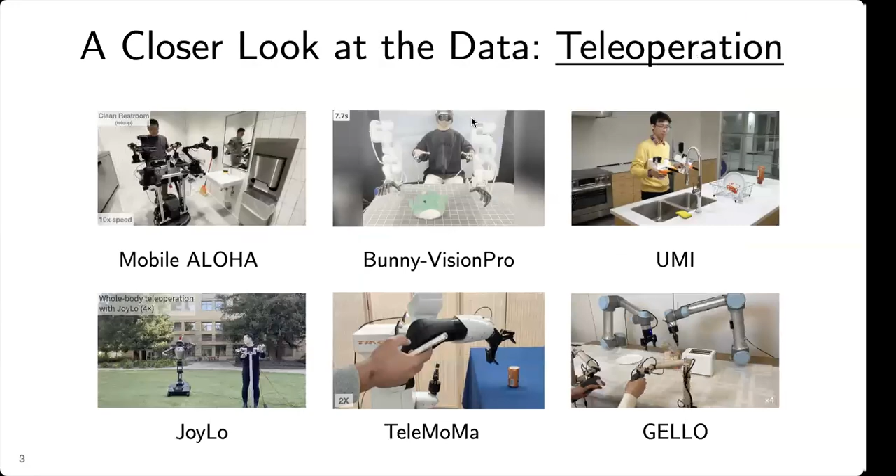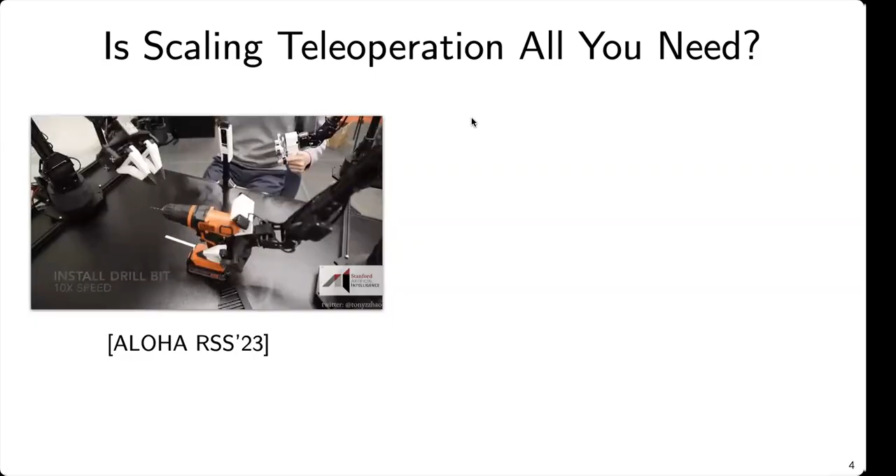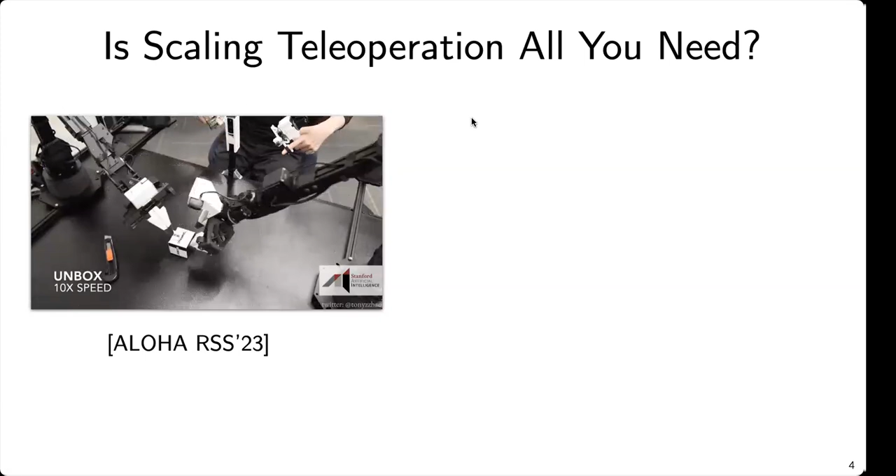Nowadays, teleoperation seems to be the dominant approach. Over the last few years, we've seen an explosion of easy to use interfaces that allow us to control robots and do more dexterous things. I think the Aloha system at RSS 2023 was really the one that made the community believe this approach can scale. Look at the dexterity you can achieve with just a low-cost bimanual robot system, doing really dexterous things like in-hand rotations and solving assembly tasks, solving these NIST assembly boards, all of which people thought parallel grippers cannot handle, but it seems like this was very promising.

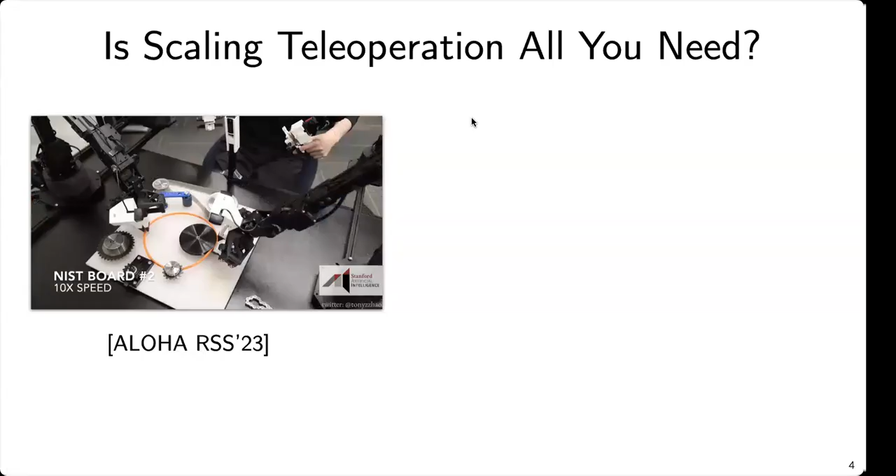But I really think the story starts showing a crack now. Collecting more and more demos started to hit a plateau. Even when we went from 6,000 to 8,000 demonstrations, the success rate was still 75%, and we couldn't go beyond that. Apart from that, there's a second problem: the speed. During teleoperation, the robot moves slowly, carefully, well below the limits of the hardware itself. So I think we are really restricting the robot's capability.

That's my first claim: teleoperation limits the robot's capability. Here's a video at 1x of my collaborator Max trying to open a bottle with teleop. This is a very simple daily task, normally taking a human a couple of seconds. But in this leader-follower setup, navigating the robot's kinematics and the gap in perception makes the task much longer.

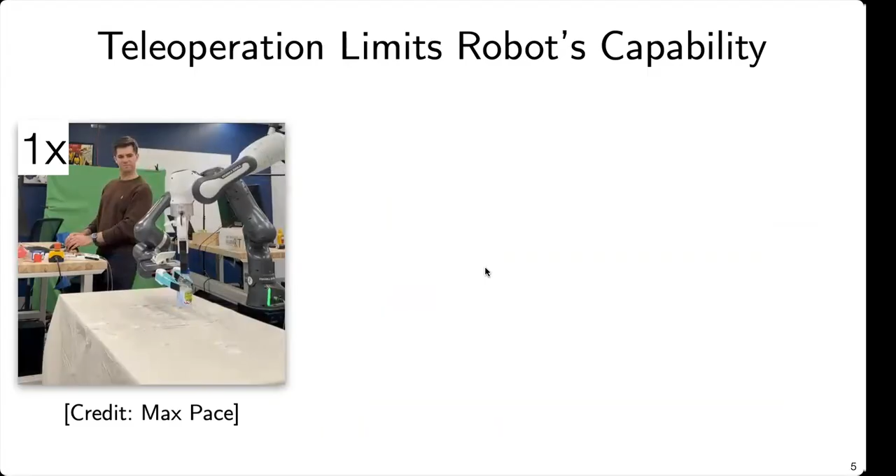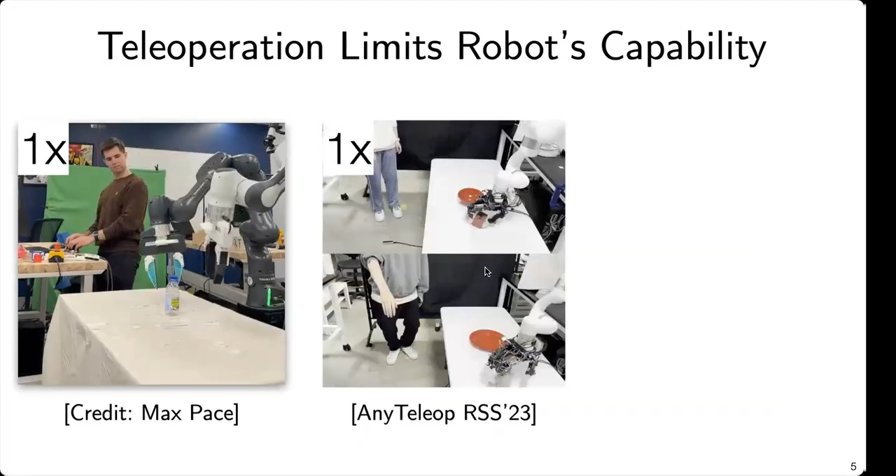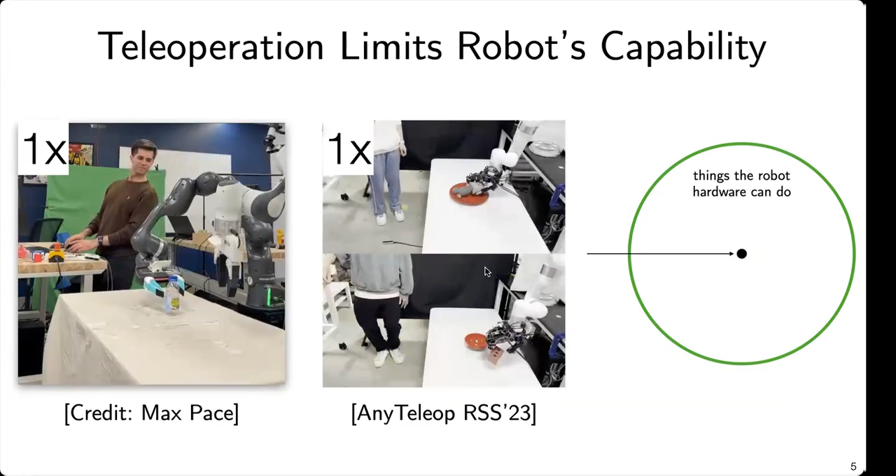This problem is more pronounced for complex robot embodiments like dexterous hands, where the control problem requires precise and forceful contacts. Teleop restricts robot hands to largely pick-and-place tasks. If this green circle is everything the hardware is physically capable of, teleoperation only ever captures a tiny speck in the circle.

Now back to the robot learning stack: imitation learning takes teleop data, which is state action pairs, and fits a neural network policy. But there are two problems with this story. First, as we just saw, teleoperation caps the quality of this data below the hardware limits. Second, this data is static and offline. It's almost entirely successful trajectories. There are no demonstrations of how to recover when things will inevitably go wrong.

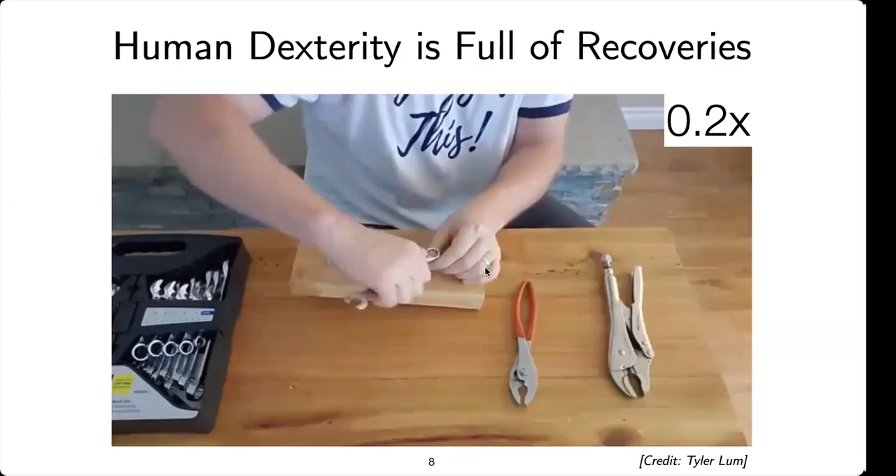So how do we achieve robots that can do these kinds of tasks? I think we should let robots learn from their own experience. In this paradigm, the policy generates its own data by doing trial and error. And I think in order for this trial and error, which involves low-level joint actions, to be safe, we'll do this inside a simulation, which is an approximate model of the world.

Now the learning stack looks a bit different. It's kind of the same arrows and the same learning-from-data story, but there's a reward attached to the state action pairs in our dataset, and it contains information about failures and counterfactuals. This process of trial and error really lets the policy learn to recover. This paradigm is called sim-to-real reinforcement learning.

In locomotion, this process of sim-to-real RL has been really successful, unlocking the limits of robot hardware. For example, the Cassie broke the Guinness World Record for the 100-meter dash under 25 seconds with this sim-to-real RL process.

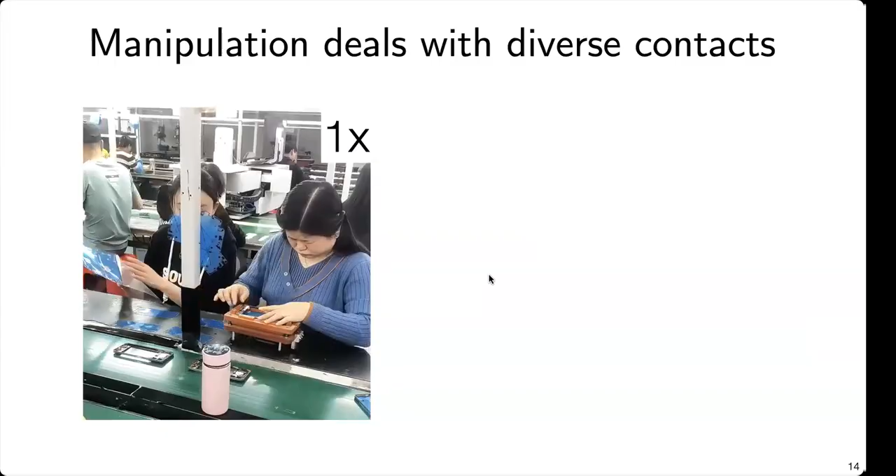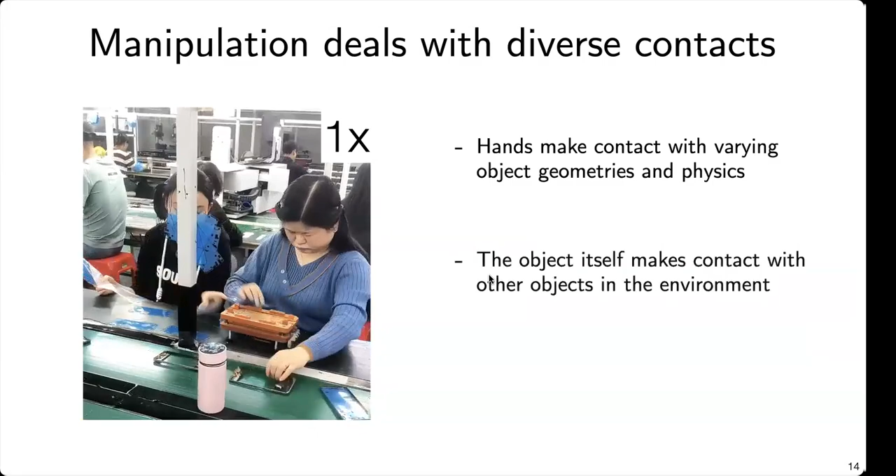On the other hand, manipulation looks so different. Take this assembly line worker: beyond the super fast speed, her hands are making contact and manipulating multiple object geometries with different physical properties. The manipulated object in itself is making contact with other objects in the environment, and contacts extend to other humans who are dynamic, moving, not static.

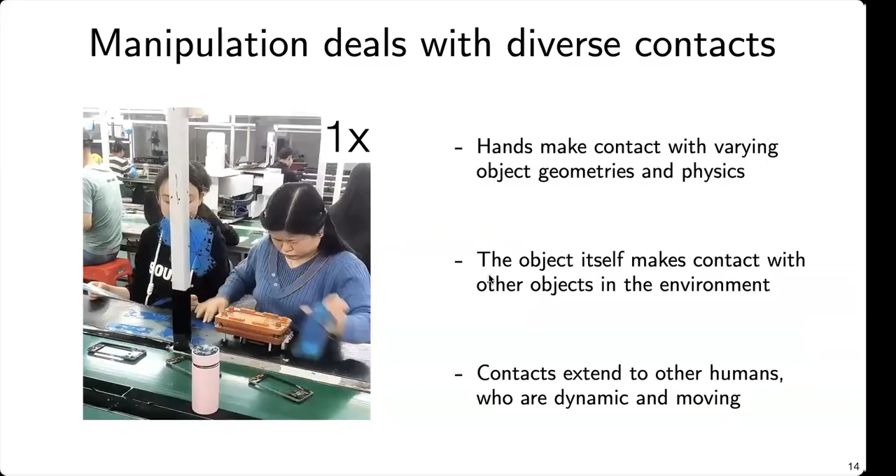So that's challenge 1.

Challenge 2 has to deal with RL itself and the exploration challenge, getting reward signal to learn from. Even here, locomotion has it easy. With a single move-forward progress reward, DeepMind showed back in 2017 in MuJoCo that you can train diverse robot embodiments to run, jump, crouch, climb through mazes. I think it's because throughout the state space, the reward is dense, which makes RL exploration easier, as there's always some reward gradient to follow and make policy improvements.

On the other hand, it's more difficult to write reward functions in manipulation tasks. Consider things like kneading dough. It's not super clear what's a dense reward here, what's the sequence of states the robot needs to complete. I think the signal lies in the narrow corridor to the goal. If you're not on this path, you're basically not getting any signal for policy improvement, and this makes RL exploration brutally hard. So that's challenge 2.

Challenge 3 is about closing the sim-to-real gap itself, that is training RL policies in simulation that will actually transfer to the real world. Even here, if we compare locomotion with manipulation, on the perception side, proprioception alone gets you a long way in locomotion, which has almost no sim-to-real gap.

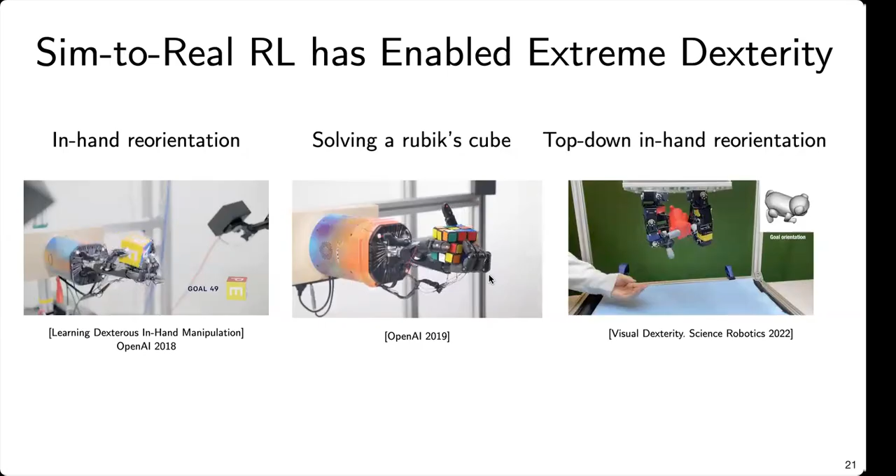And these results are not exclusive to OpenAI. Academia also reproduced these results, doing even more challenging tasks like top-down in-hand reorientation, where you're controlling the object against gravity.

The common problem here, though, is that each of these projects is single task, and there's a considerable amount of task-specific reward tuning and environment design that has to go into making these policies work. For one task, you're spending multiple months to get this pipeline up and running.

Each project hand-engineered this tiny overlap between what the robot can do in the real world and what the robot can do in simulation. And if you have to do this manually every time you set up a new task, this won't scale.

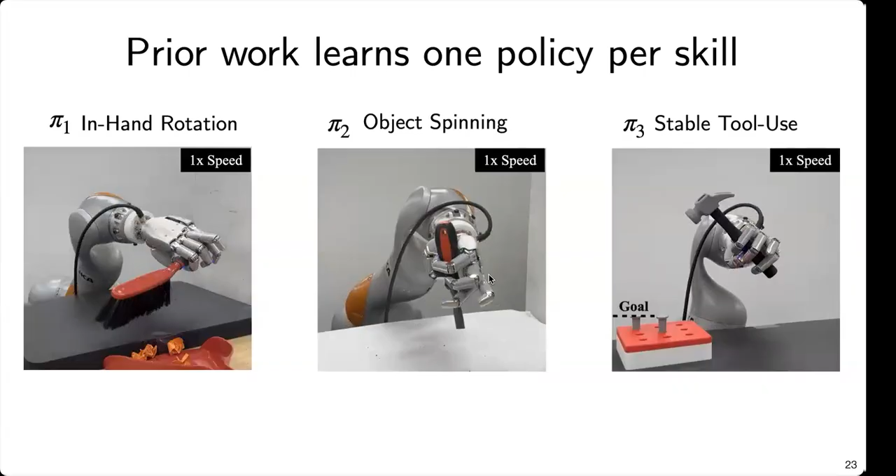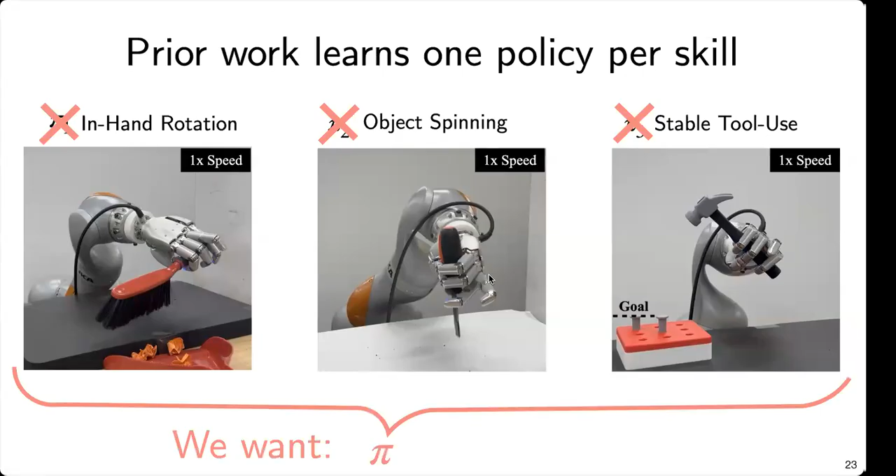Prior work learns one policy per skill, a separate policy for in-hand rotation, separate policy for spinning, another for tool use, each with its own task specification, reward, and environment design. This doesn't scale. We don't want this zoo of brittle single-skill policies. Ideally, we want a unified multitask policy, trained with a single unified objective that produces general dexterity.

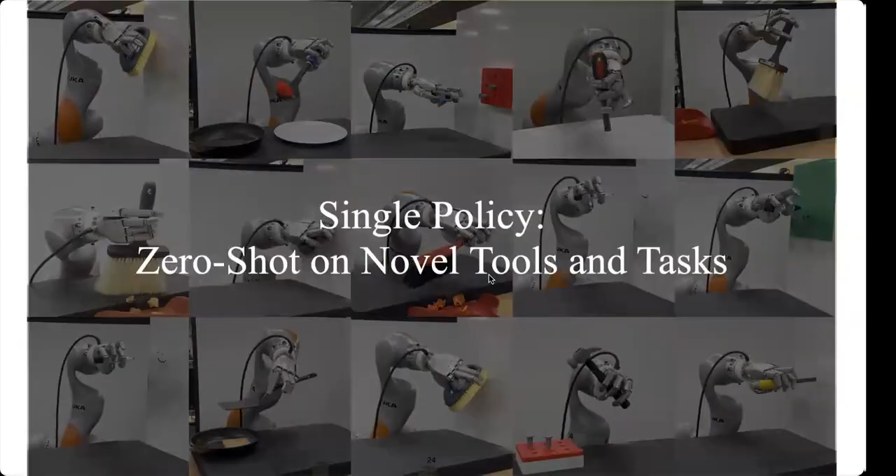That's the goal of the first piece of work I'm going to talk about: train an RL policy in simulation that can apply zero-shot on novel tools and tasks. This is SimToolReal, joint work led with Tyler, which will appear at RSS this year.

The key insight here is to unify manipulation as goal reaching. Instead of thinking of specific verbs like hammering or sweeping, what if we consider each task to be a composition of sub-goal reaching problems? Here, the green wisp you see is showing the goal poses that the policy is tracking, and we can break down a large amount of manipulation problems by just composing multiple goal reaching problems.

That makes the training objective for RL simple and general. We will just get good at this unified training objective, where we procedurally generate primitive objects in simulation, sample random goal poses for the robot policy to track, and then train with massively parallel RL in simulation, manipulating these random objects to random goals.

And if we keep getting good at this singular objective, we can zero-shot transfer at test time to new tools and new tasks. We don't require any task labels, no per-task rewards, just this unified objective.

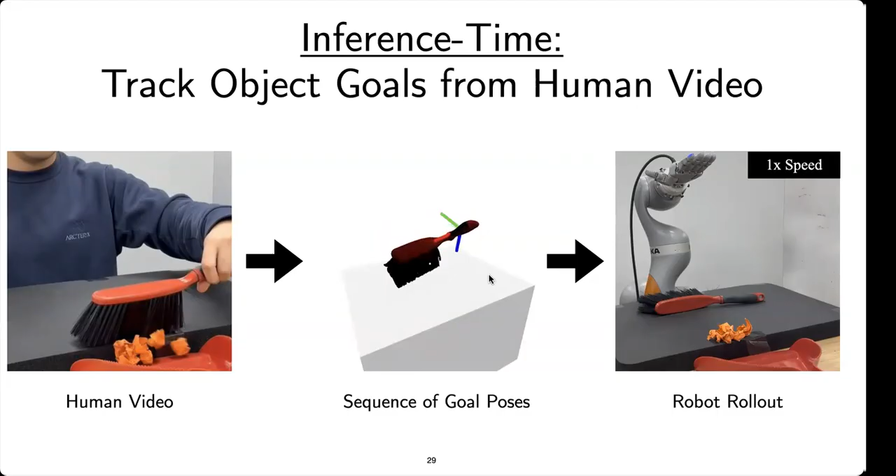So here we collected a human video showing how to sweep a brush across the table. From this, we extract a sequence of object goal poses, which is tracked one by one by the object-centered policy. Each time it hits a goal, we provide the next one, and we can complete the task by composition.

And we evaluated this policy zero-shot across 6 tool types, 12 objects, 24 tasks. A single policy was good enough to get reasonable success over this entire variety.

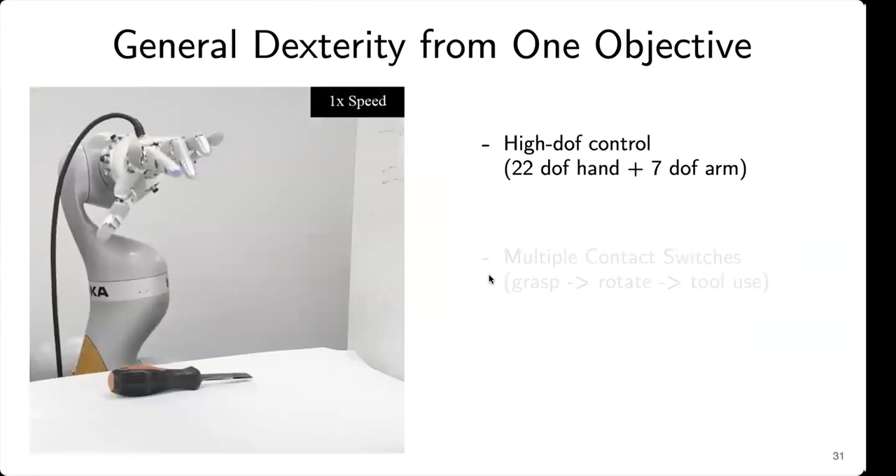But it's not the breadth that I think was hard. I want to emphasize the hard part of these tasks. First, this is high dimensional control—we are controlling 22 DoF on the hand, 7 DoF on the arm. Second, every task requires multiple contact switches: grasp the tool, reorient it in hand, and then use it.

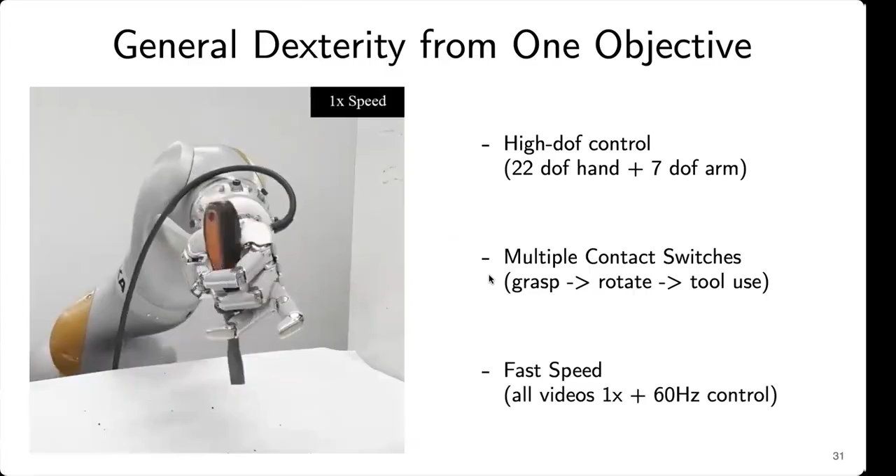And for me, the most important part is how fast it is. This is 1x, 60 hertz control. These are fast, fluid dexterities that teleoperation simply cannot match.

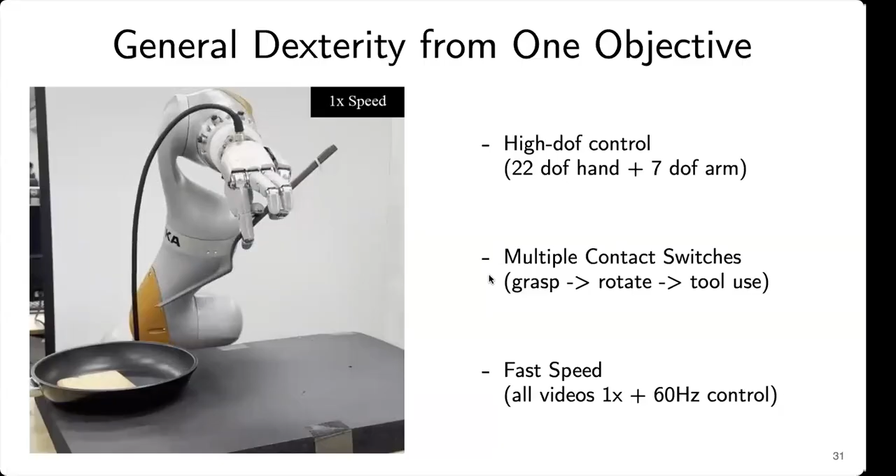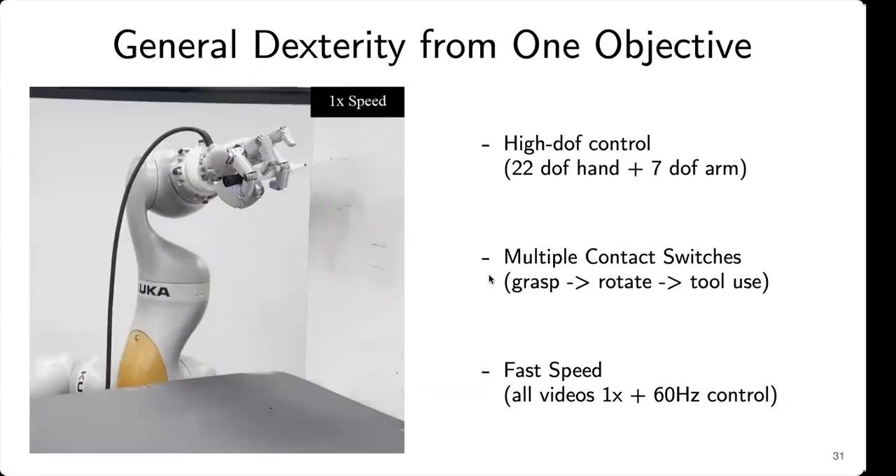Let's compare with some baselines to set a comparison point. Our method, SimToolReal, is able to do both grasping of objects and then the in-hand tool rotation, which is important.

A common baseline in prior works is actually using fixed grasps: do the grasping, then lock the grasp. The arm will try to complete the rest of the tool rotation, but this can lead to collisions with the table, and it's not a general solution.

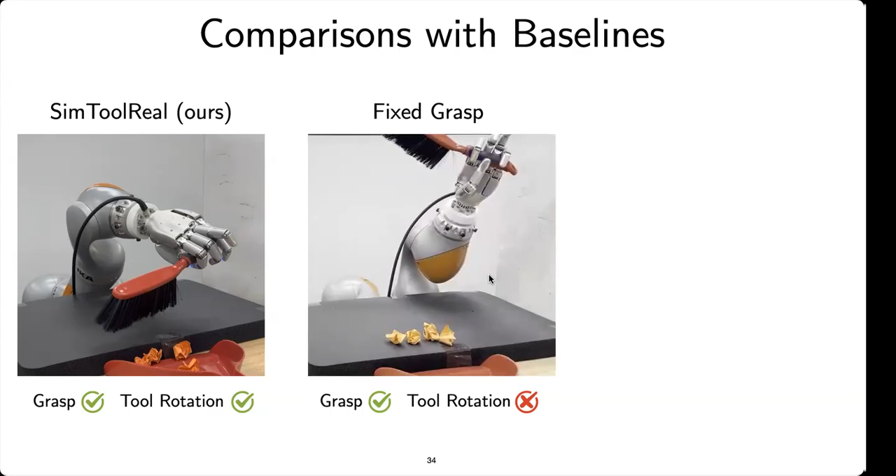Kinematic retargeting from human hand motion is another option, but human videos do not contain any contact force information, which makes it harder to complete tasks like thin handle grasping.

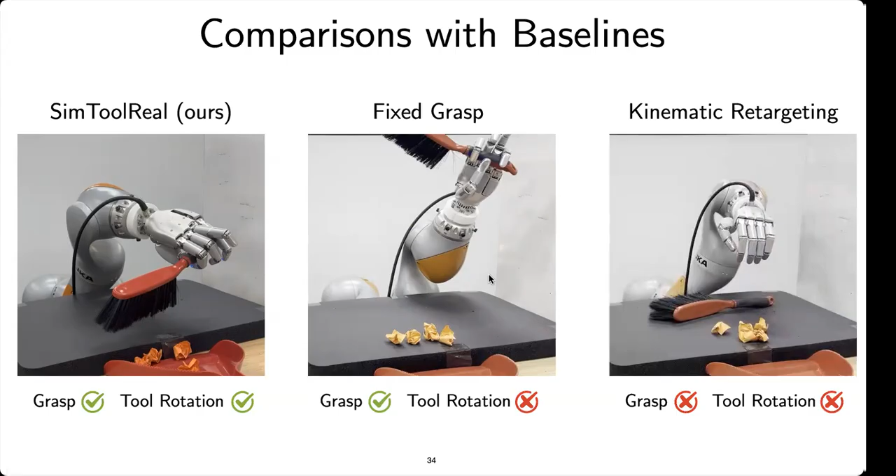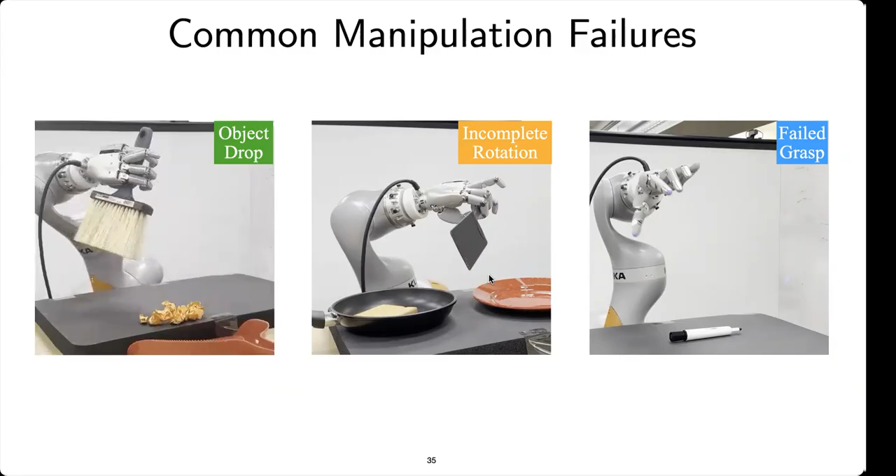Finally, SimToolReal is not perfect. There are failures. For example, things like dropping objects after grasping, or getting stuck in between rotation and not being able to achieve goals, or even failed grasps.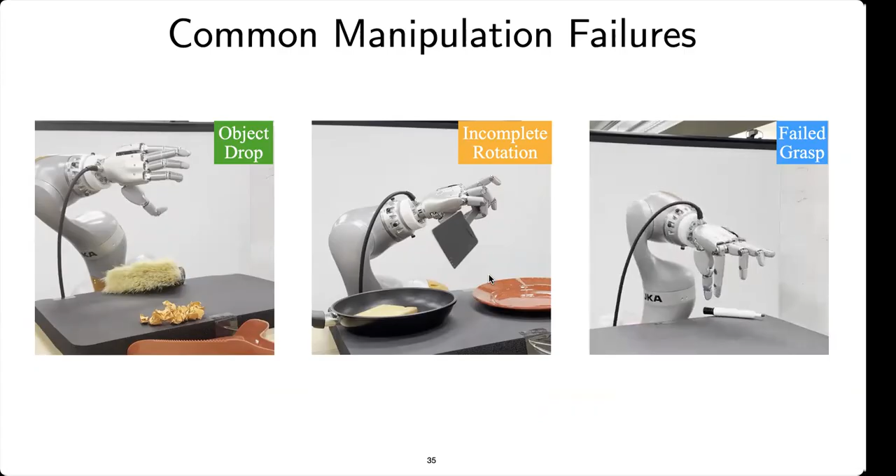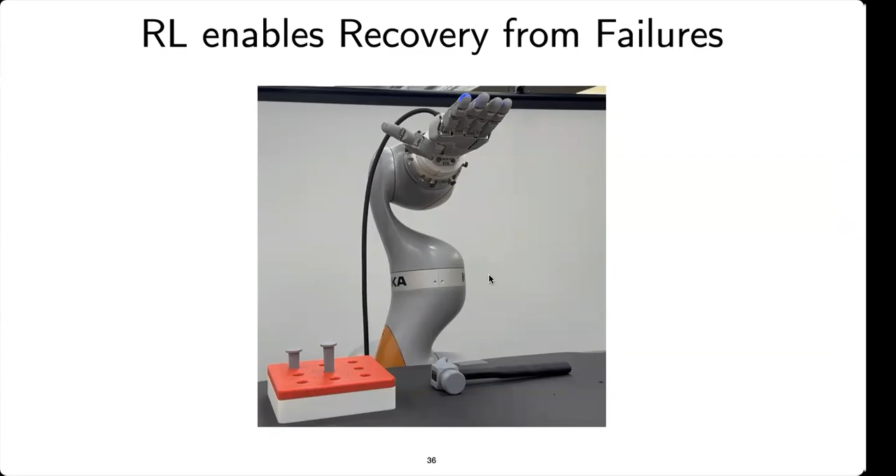But notice how it chases after the object. That's what RL gets you. RL enables the policy to recover. Here's a video where the policy actually did succeed after failure. The policy goes in for the hammer, drops it, then can go in again, reorient it in hand, get it stable, and finish the task.

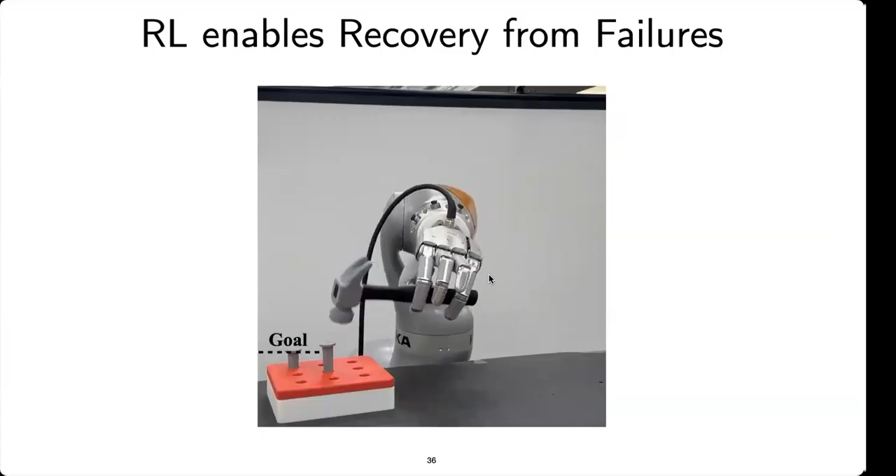So stepping back, the story of sim-to-real previously was a lot of task-specific engineering for each thing we want to do in the real world. Our contribution to challenge one is to make the sim RL objective general and unified, goal reaching on random objects, so a single policy covers the large variety and diversity of things we want in the real world. So that's how we capture diversity by a unified objective for dexterous manipulation.

Next, we want to move on to harder manipulation tasks, which will make the RL exploration more challenging. Specifically, consider contact-rich, precise assembly tasks. These are forceful, millimeter precise skills that are very difficult for robots.

There's a question. Yeah, Kushal, it's me. Just a quick clarification question.

In the previous paper, can you talk a little bit about how you were tracking the objects in real time, at inference time rather? We are using an off-the-shelf tool called Foundation Pose, which is a 6D pose tracker, and we run it at 30 hertz. Okay.

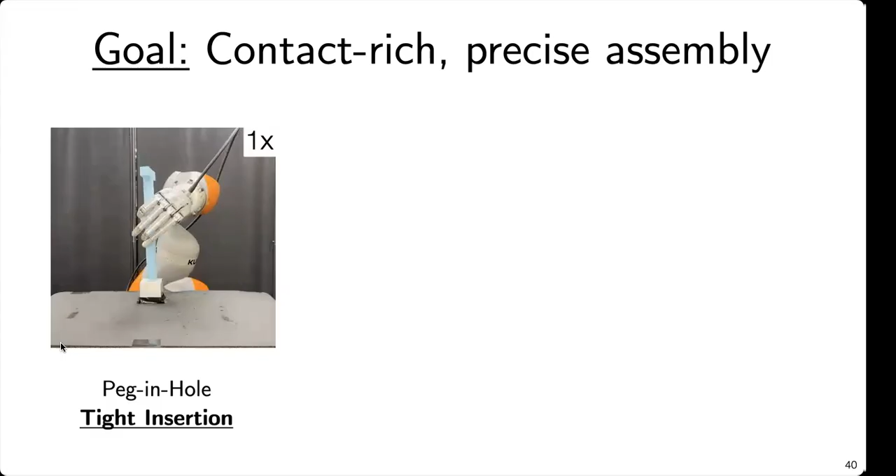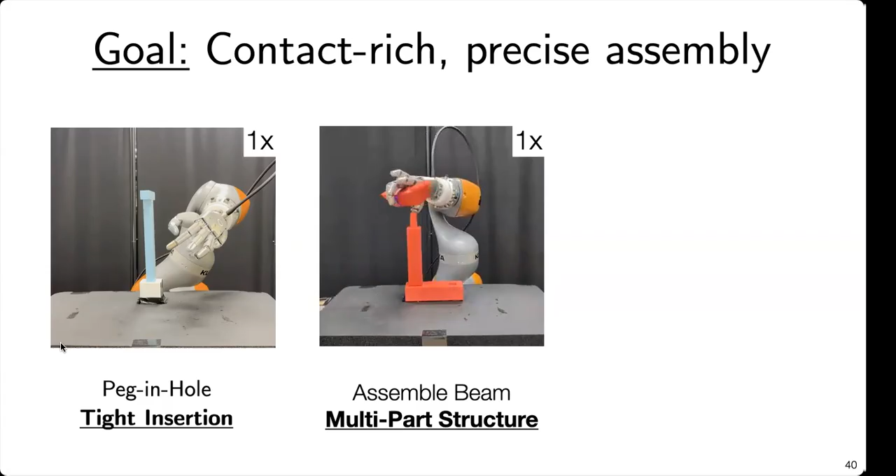Okay, so coming back to our next goal, this is contact-rich precise assembly. These are tasks like tight peg and hole insertions. See how the robot is kind of using the contact to feel for the hole region and then goes in. Second, assembling a multi-part beam structure where the assembly parts start scattered on the table. And last, consider screwing a leg onto a tabletop base.

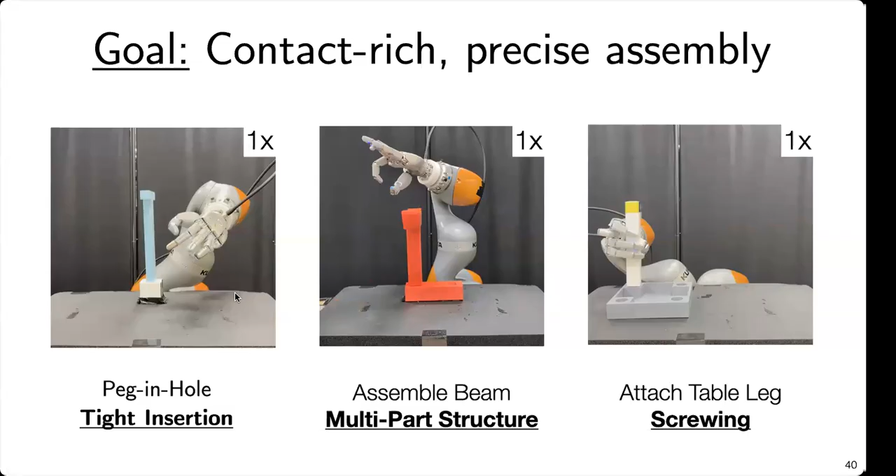These tasks are not just about being precise. It requires reasoning about contacts. And what makes this problem especially hard is that the initial states of the objects are all over the place, and the problem is defined just by the goal state to achieve.

So going from start to finish is not a single motion. It's a long chain of exploration of things like grasping, in-hand rotation, goal pose reaching, and the final contact-rich interaction with the fixture. Success signal is only achieved after this long horizon of exploration, which can make RL hard.

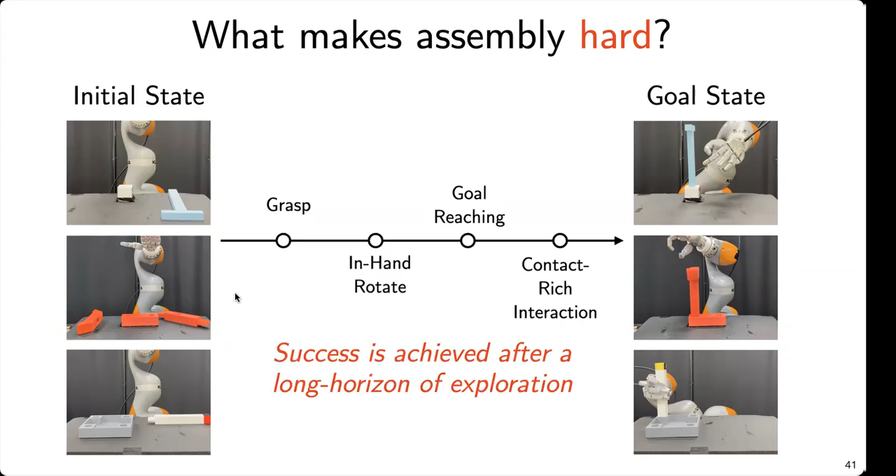One option that's kind of obvious here is why not just reuse SimToolReal and see what happens. It's already a goal-reaching policy. So what we can do is detect the current object pose, detect the goal object pose, which is the fixture pose, and just ask the SimToolReal policy to track this. And this kind of doesn't work for tight insertions, and it's quite unsafe.

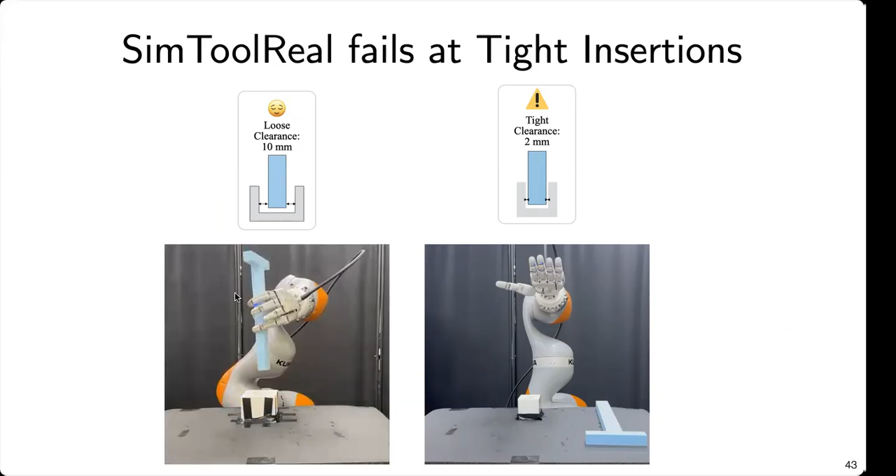Here we define clearance as the distance between the peg and the hole walls, kind of visualized here. We'll start with a simpler version of this problem. SimToolReal was trained to reach goals in free space, so even a small imprecision makes the peg contact with the hole fixture, and now it's not going to be responsive. It's going to try to ignore the contact forces and just try to bulldoze in.

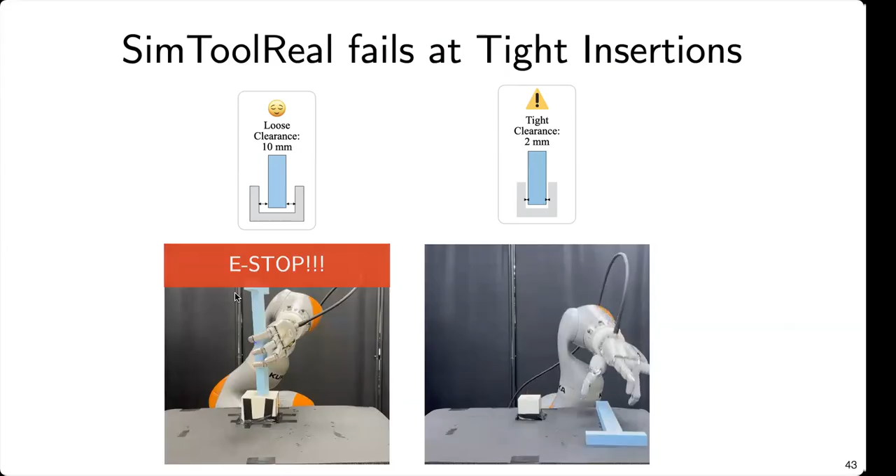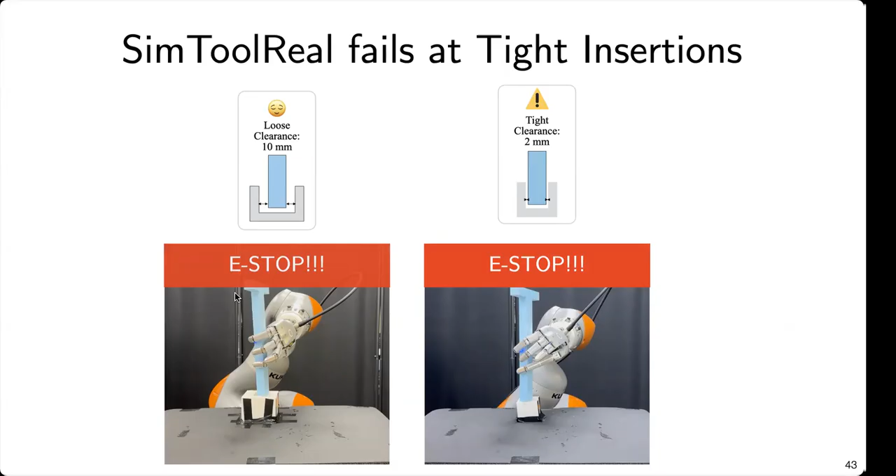And at 2 millimeters clearance, this is more hard. This policy is generally forcefully ignoring contact, which kind of makes this unsafe for deployment. So this was kind of a bad idea.

So let's try option 2: just train RL from scratch on this new task. We assume access to the CAD assembly design file, which defines the goal state for the assembly, and we can spin up parallel simulation environments with randomized initial part positions and try to solve this with RL.

We can also follow prior work on assembly by disassembly to decompose this multi-part problem into subtasks: part 1, part 2, and also some intermediate goal poses. What we do is basically pull apart the structure in sim from the final position, basically disassembly, which gives us the reverse sequence of intermediate goal poses that our RL policy can track.

Still, even with this sequence of goals, it is a sparse reward, and success stays at 0 even after 24 hours of training. We also tried our best to do dense reward shaping, adding some terms to make the contact interaction easier for the robot, but we couldn't get it to work within 24 hours of training.

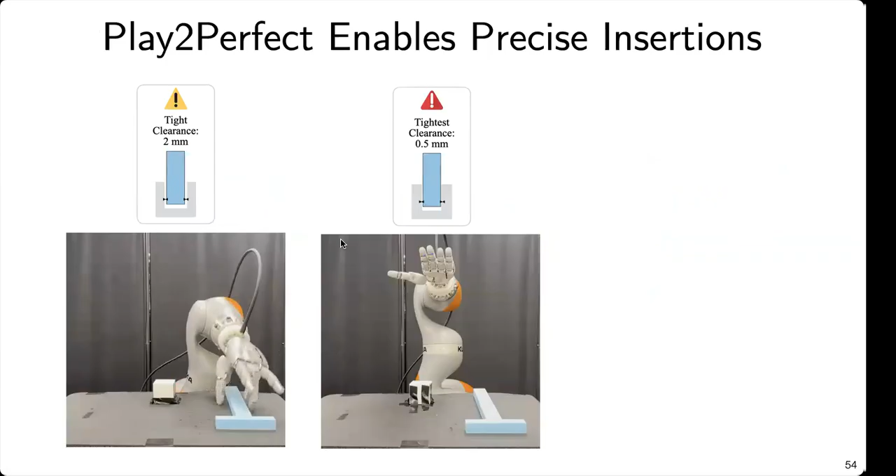Also, coming back to those precise insertions that the free space policy couldn't tackle, we'll do the tight clearance of 2 millimeters first. And what's interesting to see is the policy is not just precise. It's kind of feeling for contact and trying to slide the peg in rather than just being slow and precise.

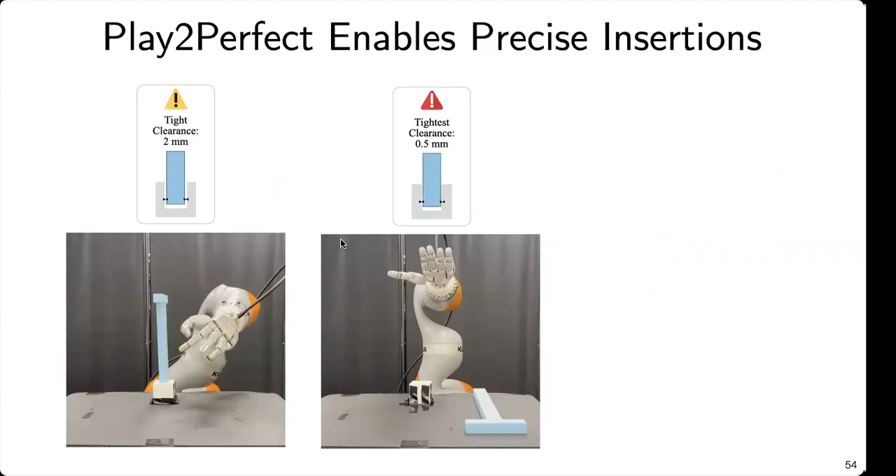And with a 0.5 millimeter clearance, here's the robot execution again.

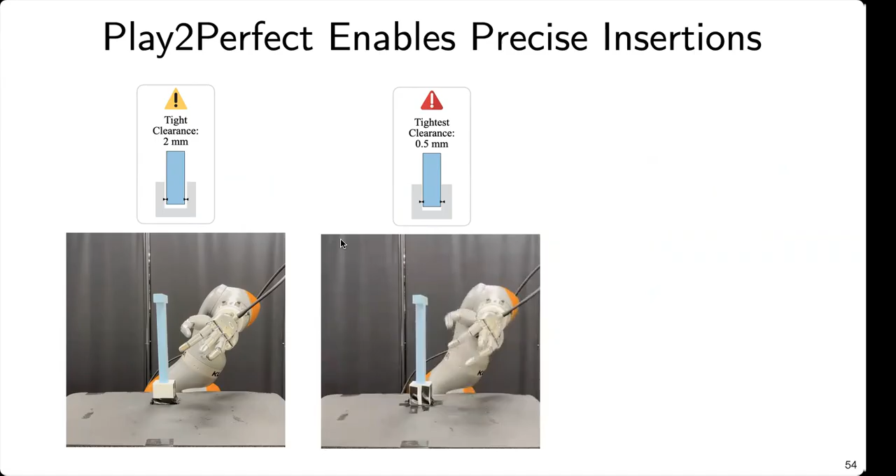We did a systematic analysis in simulation comparing the free space policy with Play to Perfect with tighter and tighter hole clearances. Our policy Play to Perfect is robust even for very tight clearances like 0.2mm. But the SimToolReal policy kind of just works when the goal is basically free space.

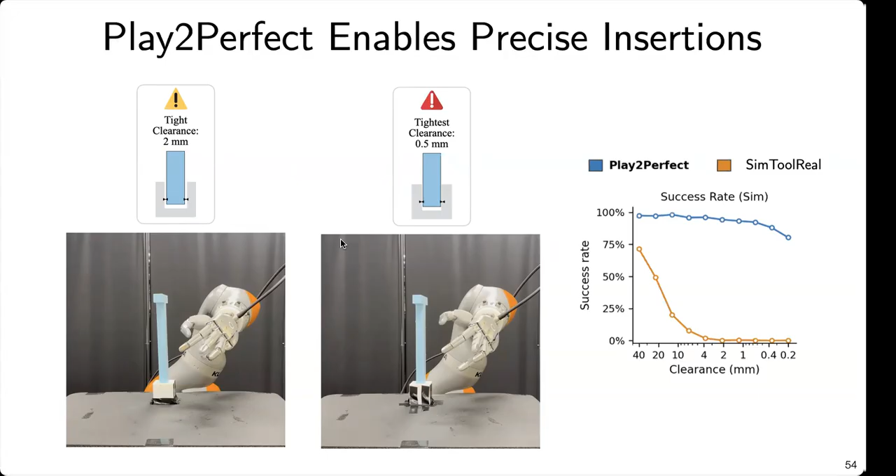The question we really wanted to answer in this work is what makes a play prior good. Specifically, we ablated 4 factors: object diversity, training objective, trajectory diversity, and goal imprecision. And we checked how it affects the RL fine-tuning stage — what is the sample efficiency with different design choices?

Second, the training objective must emphasize both translations and rotation, so 6D pose goals. If you just do translation, you barely get non-zero success rate. If you just do rotations, it's good, but you're still sacrificing the ceiling of performance.

Next, trajectory diversity matters. We train with random goals, but you can imagine also training with fixed trajectories, which doesn't work as well.

And last, we are tackling precise contact-rich tasks. So during free space goal reaching, we need the precision during this goal reaching to be precise. And if you're not precise, the performance is worse during fine-tuning.

But the overarching theme behind all these design decisions is that every design choice we end up using in Play to Perfect is the one that forces the policy to learn in-hand manipulation. This is useful because it teaches the robot to use its fingers, precisely control the pose of the object, and do the contact-rich task of assembly.

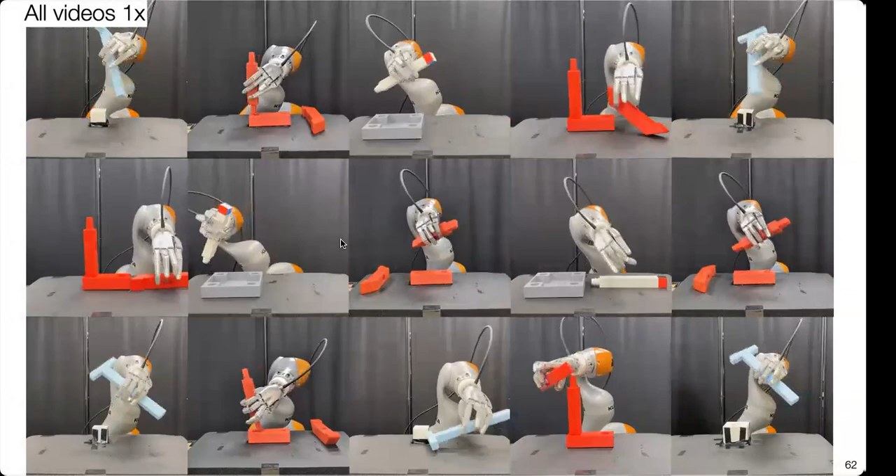Objects are scattered over the table with different initial poses. And you can notice that some rollouts take more time than others. And that's because there's some failures happening, and then the policy recovers from those failures.

This is a story of reinforcement learning again. If we train with RL, we'll get this ability to recover from failures. Let me highlight a couple of examples. These failures sometimes happen at the ultimate last step, and then the policy can recover.

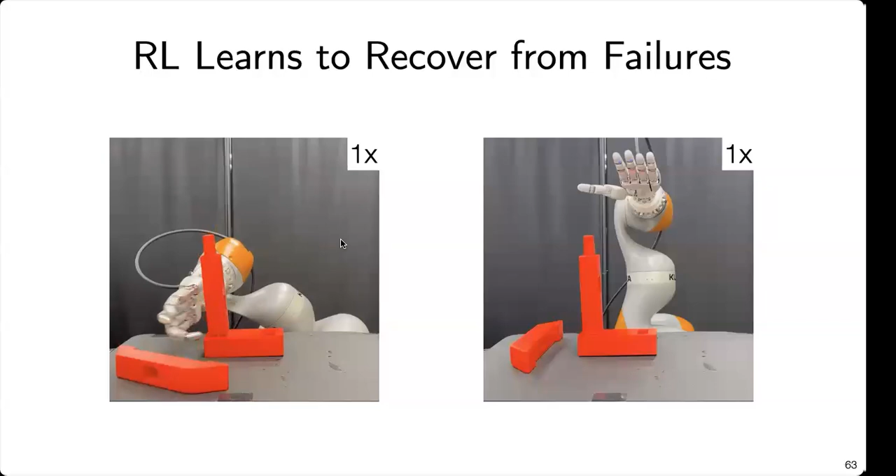Here's another example where the insertion fails at the last possible second, but the policy goes in and tries again.

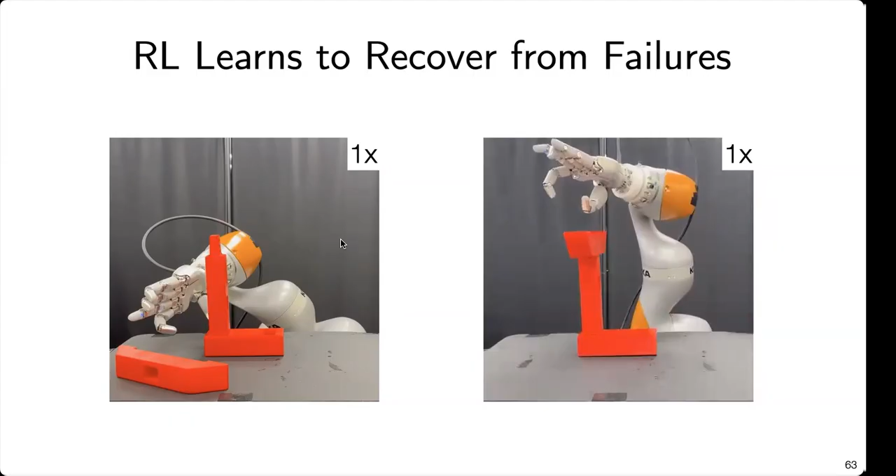That closes the second part of this talk, guiding exploration, which is addressed by bootstrapping reinforcement learning with a play prior to guide exploration.

Now we'll talk about the last challenge. This challenge has existed in both the works I've shown before, which is the sim-to-real gap.

Everything so far was deployed zero-shot: train in sim, run in real, hope it transfers. But there's always a residual gap. For example, sim to real, we saw the failure examples. It would pick up objects, drop it. Even Play to Perfect would sometimes collide with everything, create havoc.

This was not happening in simulation though. Quantitatively, sim to real dropped by 12 percentage points, Play to Perfect dropped by 20 percentage points. So we are always having this residual gap. But the deeper point is that so far when we did sim to real, we had a static policy. This policy was never closing the gap after deployment, so it can't use real experience to improve, and we'll always have to accept this residual gap.

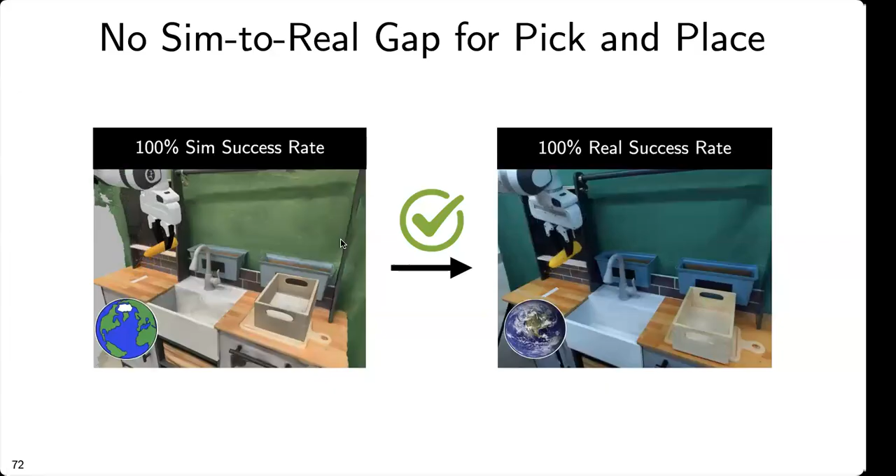With this photorealistic simulation view, you would hope that the zero-shot transfer just works. And it does work for the easy tasks. For example, this is pick and place - both sim and real success rate is basically 100%. There doesn't seem to be any gap between sim and real.

Now, it would be really ideal if we had some mechanism of minimizing the distance between these image embeddings, and then there would be no sim-to-real gap.

That's what we did by proposing an online calibration scheme to reduce the sim-to-real gap from real world experience. Concretely, we rolled out our image-based policy in the real world, and the actions that were executed in the real world are replayed in this digital twin spawned with matching initial state. Then we have natural pairing between a sim rollout and a real world rollout, and we can compare the image embeddings.

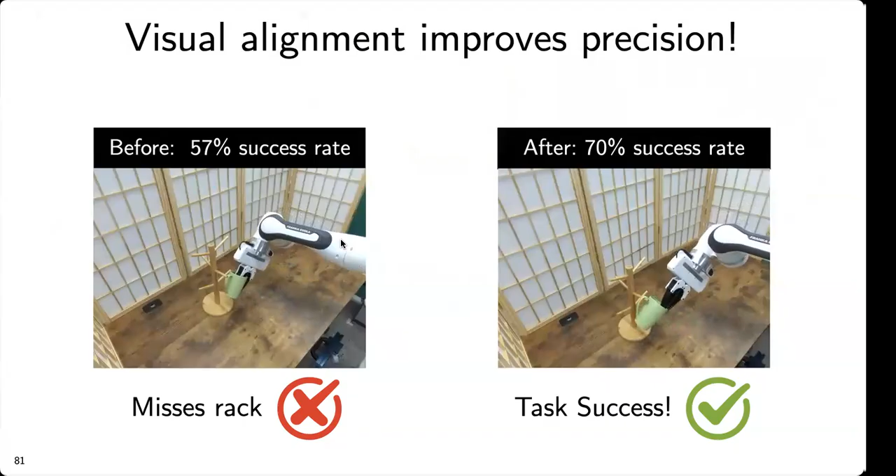Minimizing the visual sim-to-real gap also helps improve the performance of this policy. Earlier, it would miss the rack more frequently, and after 10 rollouts of calibration, we can see a significant increase in task success.

So this was the hardest task, the mug insertion. In easier tasks, we actually don't even need calibration because the sim-to-real gap isn't even there - the zero-shot performance is good enough. But as we increase the hardness of the task, this alignment process is needed more and more. Here we just did the alignment with 10 rollouts, but it would be an interesting future experiment to scale more and more real-world experience and see if the performance keeps improving.

So that's challenge 3: closing the sim-to-real gap by online alignment of the visual encoder.

Before I conclude, during my PhD I worked on other projects towards the broader goal of dexterous and collaborative manipulation, towards robots that are doing hard manipulation tasks. I want to talk about that next. Starting with diversity, I talked about dexterous manipulation - there's a parallel collaborative manipulation story as well.

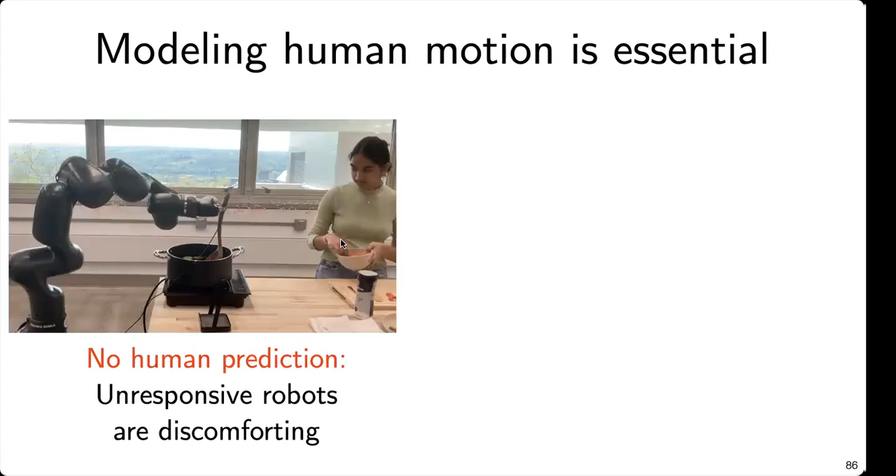Capturing real-world diversity in collaborative manipulation means capturing people, and that requires models of human motion. Without it, a robot is unresponsive in a shared space, and it can be generally discomforting in such a setting - the human is planning around the robot rather than any semblance of collaboration. But if we can have predictive models of human motion, the robot can be more smart, anticipate the person, and make room preemptively.

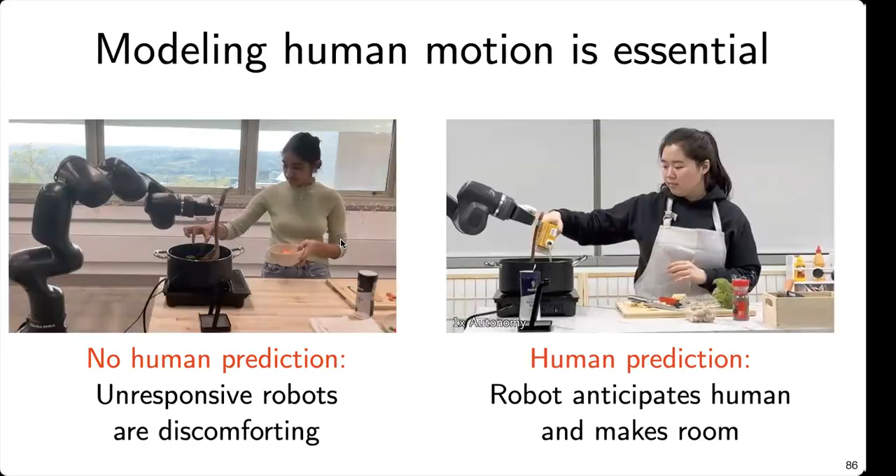This is a line of work across three papers on modeling human motion for collaboration. To enable this research, we first collected COMAD, a collaborative manipulation dataset. This is high quality motion capture data of two humans interacting with each other and also some human-robot interactions.

Even for the second challenge, which is guiding RL exploration, we can do things beyond just pre-training. There's another source of prior that I've worked on, which is human videos. Specifically, I want to highlight this work, one-shot imitation under mismatched execution, where the human and robot motion for the same task differed. Still, we were able to learn this mapping between the human video and robot actions.

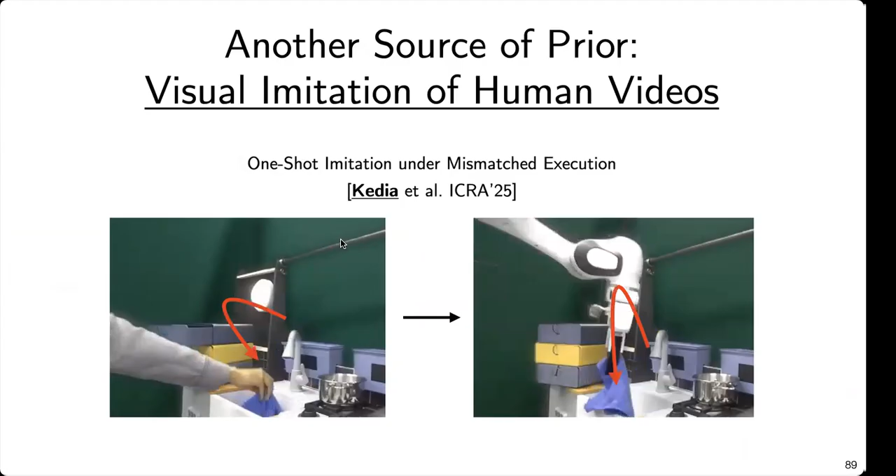Lastly, we talked about handling the sim-to-real gap online by real-world experience, but we can also approach this problem offline. The specific construction we can do is consider a problem of offline learning from mismatched data, so our data is not something that can directly work. This is the sim-to-real gap, and this kind of gap also exists in human-to-robot transfer. So we had this work in ICRA last year called X-Diffusion, which treats the embodiment gap between humans and robots as noise and co-trains on it smartly in the diffusion process.

I also had earlier work on planning with imperfect human models. Here is an example of multi-agent navigation, even when the robot has imperfect models of the other agents.

Put together, this fills out the thesis grid. I think these are the three key challenges which are restricting sim-to-real RL in manipulation, and I think we have made progress in enabling manipulation robots to do more hard tasks.

Let me close by zooming all the way out and talking about the broader goal of physical AI. I think there's a general trend that we want robots that demand less from humans. Classical robots demand a lot. They demand you to code up hand-engineered control policies for each task the industrial robot will work on. And anytime the environment changes or the object changes, the human has to go in again and write the control policy.

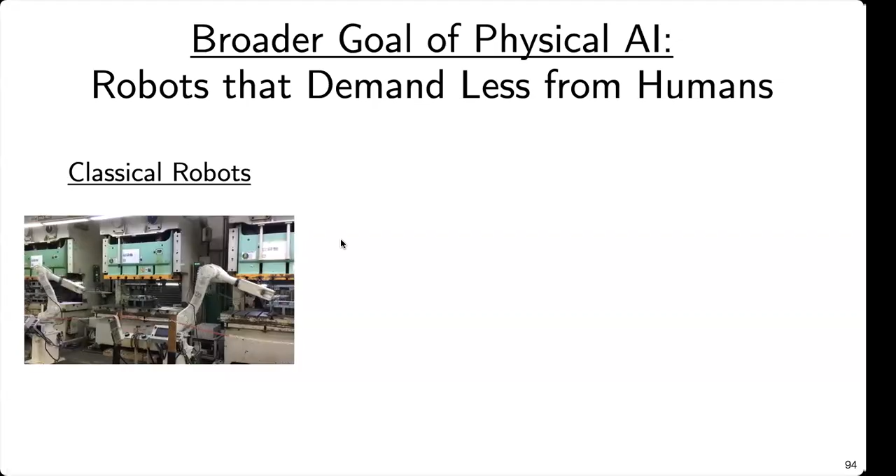The shift has been towards robots that learn from data alone. It requires less manual engineering. And even within these learning-based robots, I think there has been a trend of demanding less and less from humans.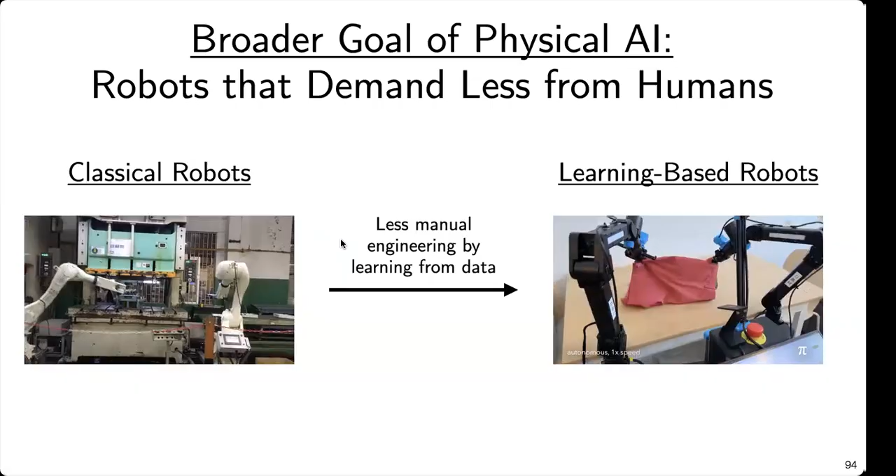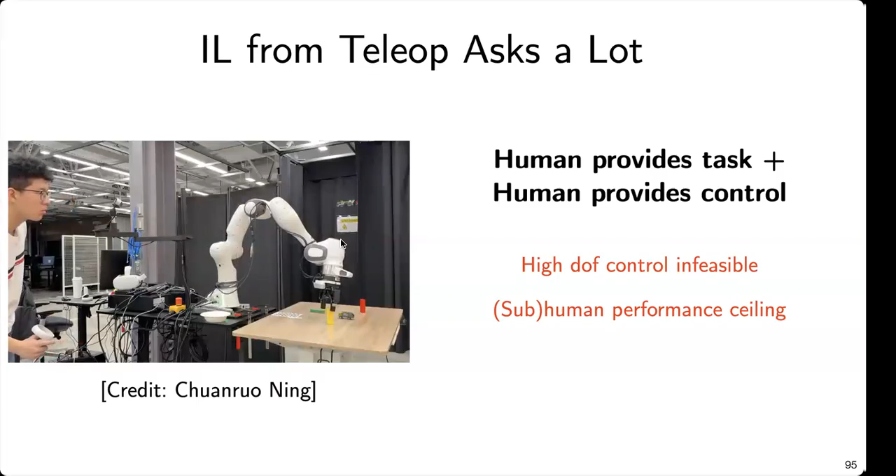For example, imitation learning from teleoperation asks a lot from the human. It asks the human for both halves of the manipulation behavior: setting up the task environment, and also the control to solve the task. This method is not great for high dimensional control because of this leader-follower setup, and in some senses there's a subhuman performance ceiling. The speed and dexterity are not comparable to a human, even if the hardware allows it.

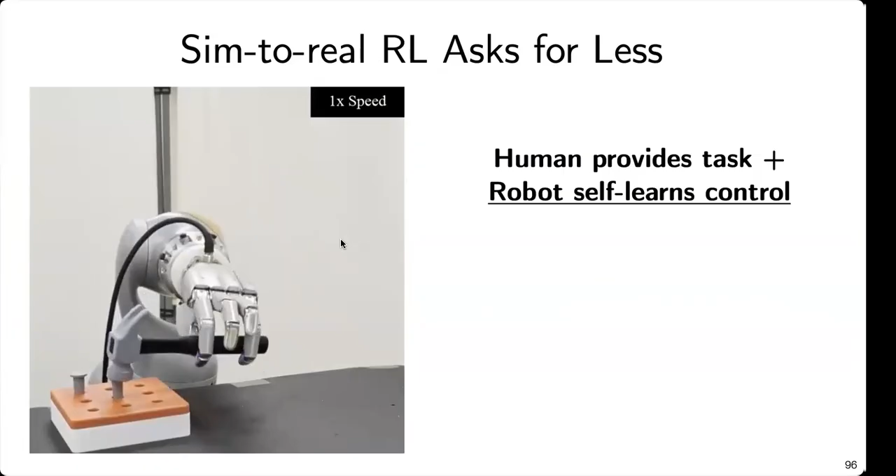Now, sim-to-real RL asks for less. The human provides only the tasks in simulation, and the robot self-learns the control through trial and error. Now high dimensional control is more feasible because the robot will discover it on its own, and the performance can be superhuman because it's not bounded by what a person can demonstrate.

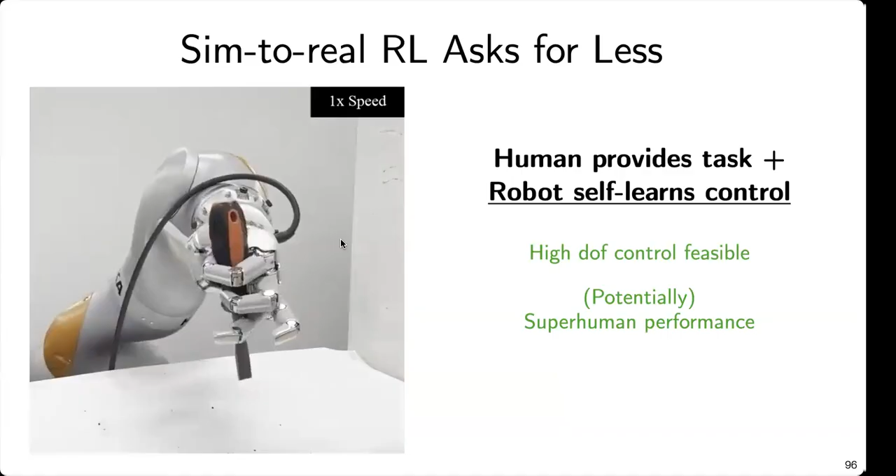I think this is also a path for a curious robot who chooses its own tasks that interest it, then solves those tasks, and then chooses its next task. This requires no human to be in the loop.

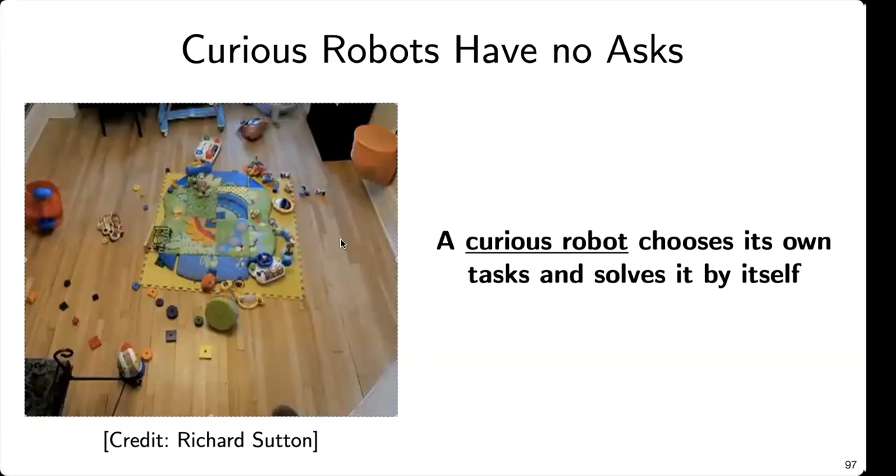In this simulation, we do trial and error, generate data for RL updates, which goes back into the policy. So this is a continual learning loop with rollouts, introspection, simulation update, practice, improvement. Just like humans, I imagine the process starts with some human supervision at the start, but increasingly the human goes out of the loop. And that's where I see this work heading.

With that, I want to say none of this work in this thesis was solo and couldn't have been done without the help of so many people. I want to thank everyone. Tapo, thanks for always pushing me to put my robots closer to humans and to tackle the genuinely hard problems in robotics.

Kuan, for bringing so much life into the Cornell robot learning community after you joined and supporting me throughout. Karen, thank you for being so kind and a positive influence on me. I always remember you saying, reflecting on our time together, that it's not the results that motivate you.

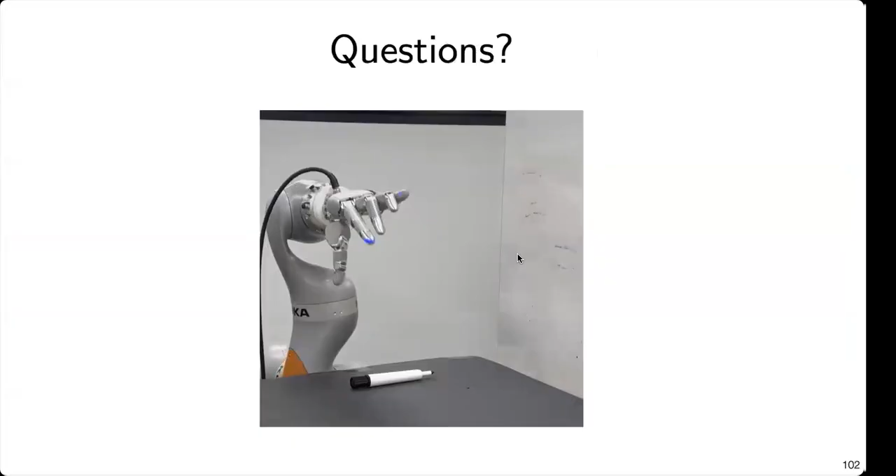With that, I'm going to let the robot speak for itself, draw a smiley, and we can take some questions from the audience.

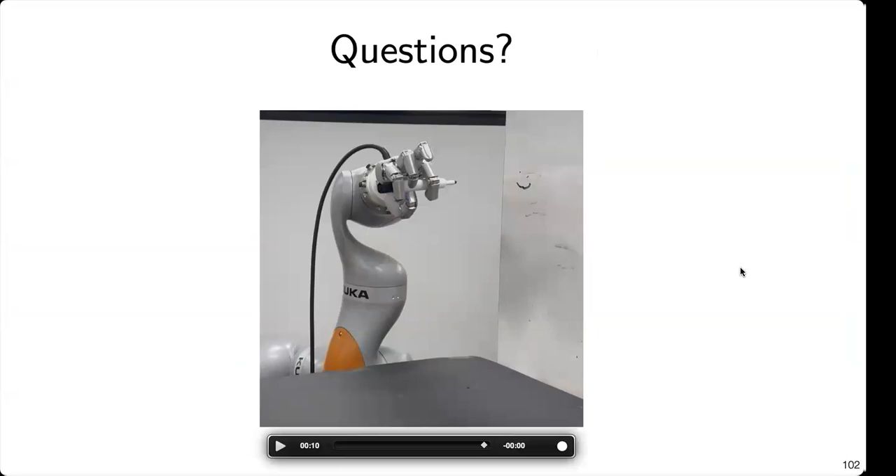Hi, Kushal. Very cool, I really enjoyed watching the real robot videos. I have a question for the X-Sim work. In that paper you talk about how you can bridge the visual domain gap between sim and real. I was curious if you also have any insights into how to bridge the dynamics gap, which you mentioned.

We tackled specifically the visual gap in X-Sim, and we did this through a process of real-to-sim after deployment. So what we did was we did some real rollouts, reflected on the visual embeddings, and then updated the simulator. I think we can do a similar story for dynamics too, and we've seen papers in the locomotion domain that have done similar things. What makes manipulation different, I think, is the perception side, so that's what we focused on first, but definitely something we should focus on in future work.

Yeah, cool. Thank you.

Well, I have a question. Great presentation. You talk about RL a lot in this work. I can imagine the simulation RL is a bit like RL with verifiable reward. Do you think there's any way there'd be like an RLHF for these kind of robots?

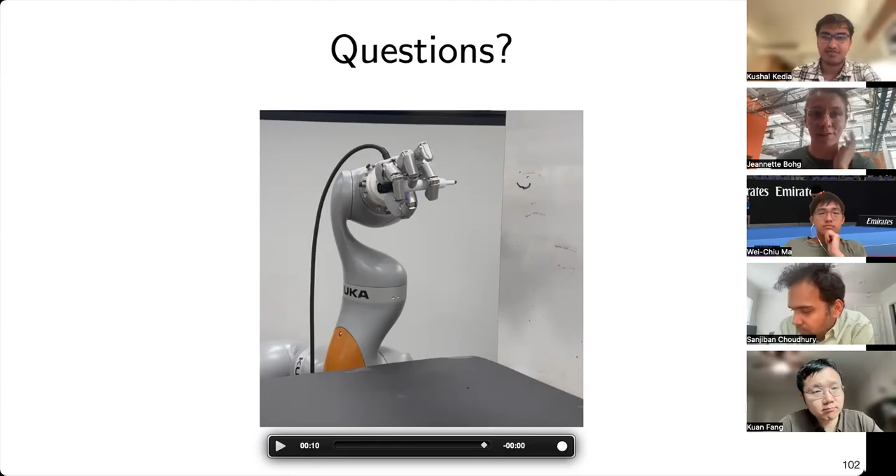So there's a lot of work actually to do. I agree with the point about tracks and keypoints with what Kushal said, but I think there's a lot of work to be done for the vision community if they want to continue working on this and go with this to robotics, to actually make it work with the kind of statistics you see in a robot manipulation video. This was not really a question, but I wanted to provide this information because we actually tested the current methods and they're not working.

Yeah, thanks for helping me in my defense, Jeannette. Any more questions from the audience, from the committee, publicly, before we go to closed doors?

Okay, maybe I'll ask this since every member of the committee asked a public question. Kushal, fantastic talk as usual. I was wondering, building up on the previous question, you focused on visual realism, and you said dynamic realism is part of future work. Do you have any high-level thoughts on whether the simulator really needs to be accurate in terms of visual realism or physical realism to be able to do the task? Or sometimes can you sacrifice some accuracy as long as you can do the task? What matters for what makes a simulator good?

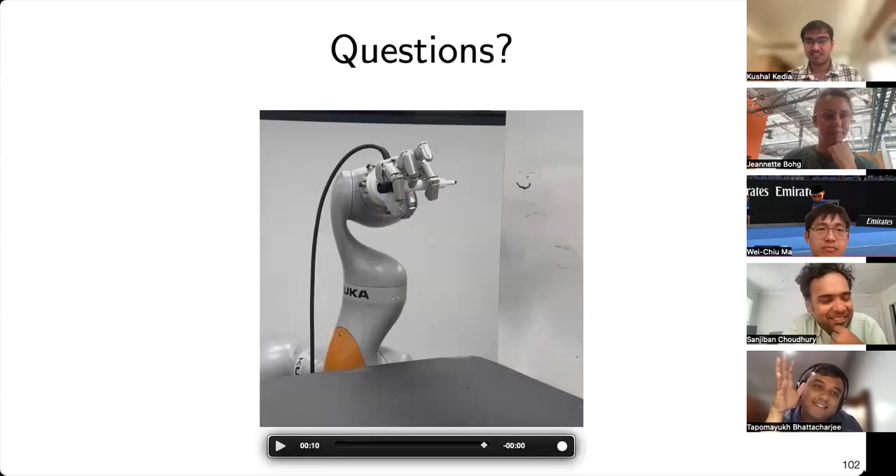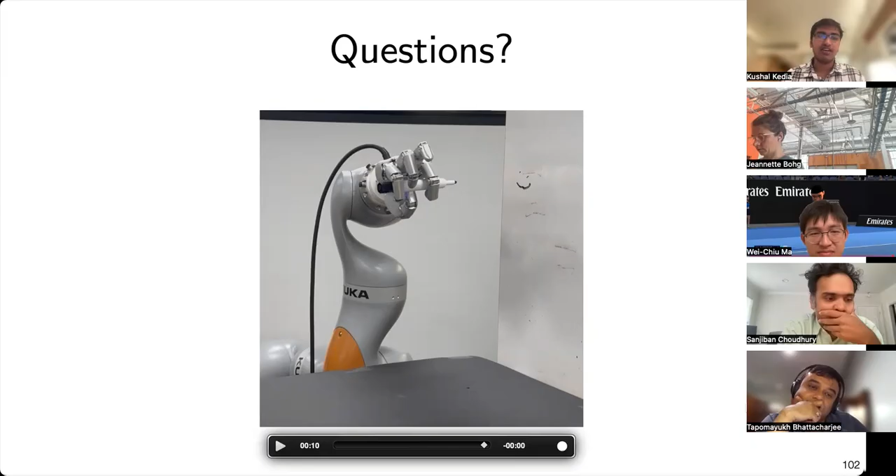I see, awesome. Do you think it's task dependent, or context dependent? I think it's task dependent, right? Like you need more precision for things like the precise assembly tasks. So even the simulations for the precise assembly task run much slower than free space motion, we get like 4x slower speeds in simulation. And for deformables, the simulation is actually slower than the real world. So yeah, that's the trade-off.